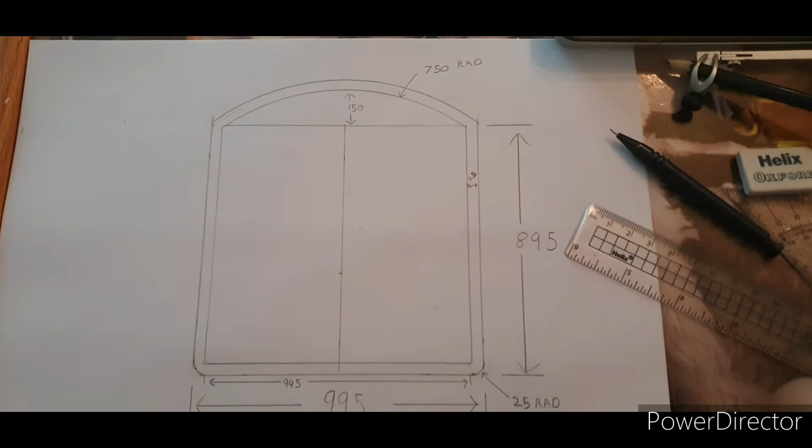Right, so pretty much that is the main frame. It's all going to be made out of 25mm angle iron. I'm going to try and make all this frame out of one piece, you'll see how I plan on doing that. There will be a lot of welding because I haven't got a bender, a roller to be able to do that, so I'm going to have to do loads of little cuts to hopefully bend it and get that bit of a curve in it there.

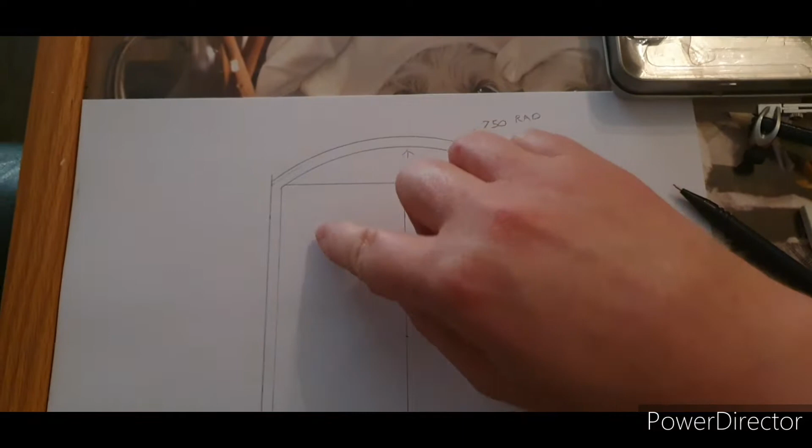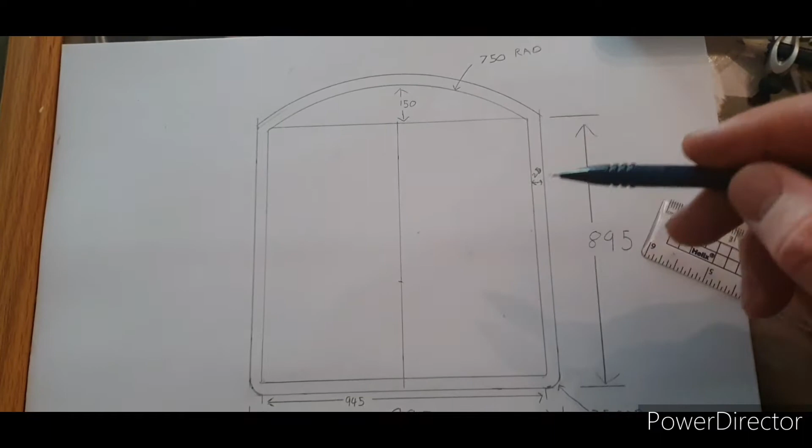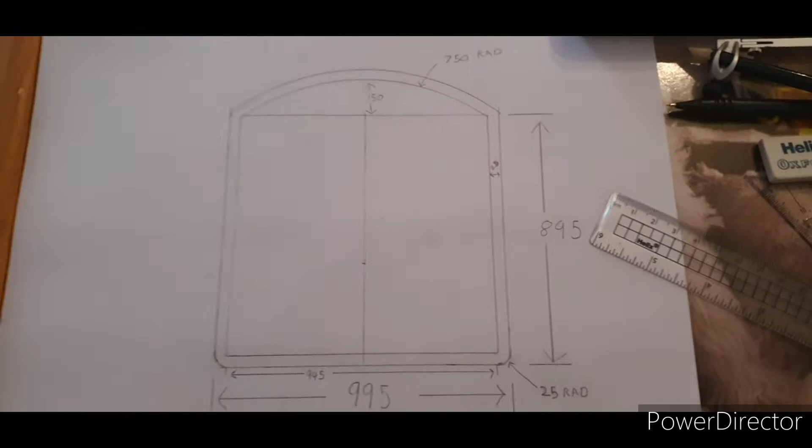And then my plan is, I've not sourced any wood yet, I'm wanting to put some wooden slats in it, so I haven't got a clue what size wood I'm going to be able to use yet. For each gap on each bit of wood, I'm going to put another 25mm piece of flat bar covering each gap. I might even make some little rivets to go all the way around to hold the wood in, as well as on the down pieces I'm going to put in. You don't need it, but I think it'll make it look really nice, some handmade rivets to go all the way around it.

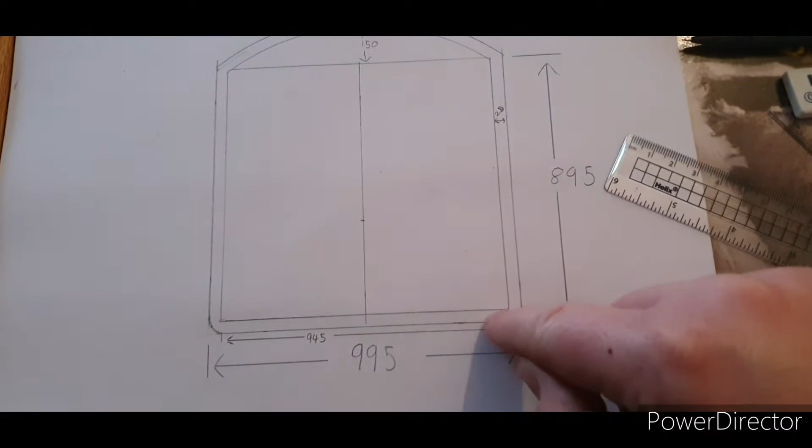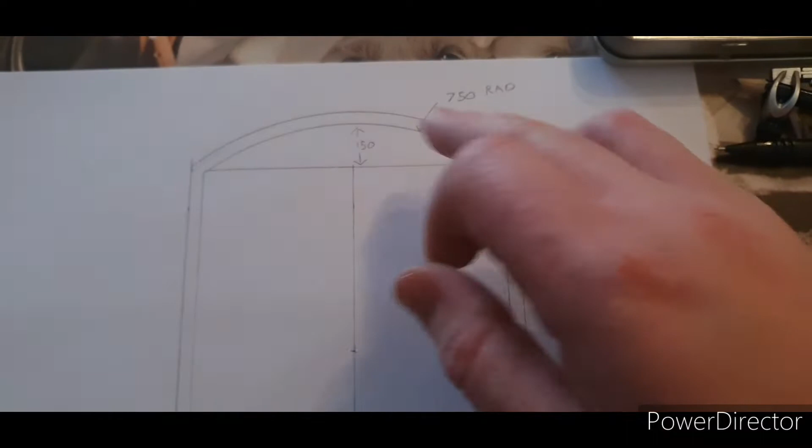So yeah, what I'm going to do now is work out a quick template on how I'm going to cut the angle iron so I can bend it to get a nice square corner on the inside and a 25mm rad on the outside corners. I'll also need to do the same with this one - it's not as critical because it's going to be a bit of a guess when I come to do it. I've got it as like a 750 rad, but we'll just see how it turns out. I'm not overly bothered about that one.

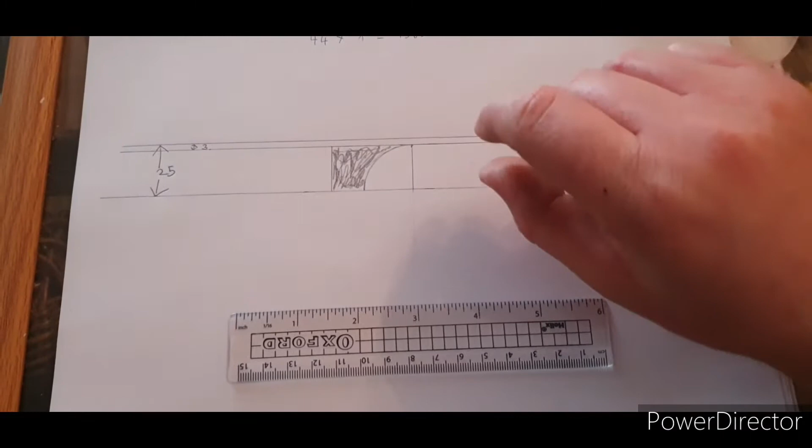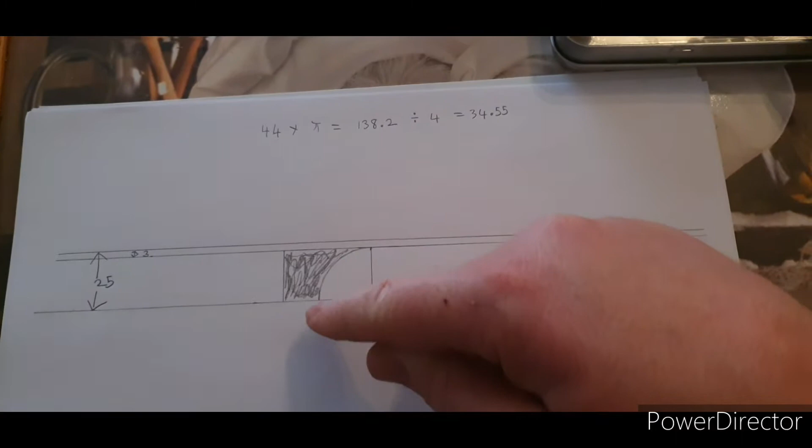So what I've got here is, imagine this is your angle iron. This is one flat surface, the other is facing downwards. It's 25mm angle iron by 3mm thickness. So what I've done here is, this is the 3mm, so from here to here would be 22mm. So what you do is figure out the rad - so it's a 22mm rad.

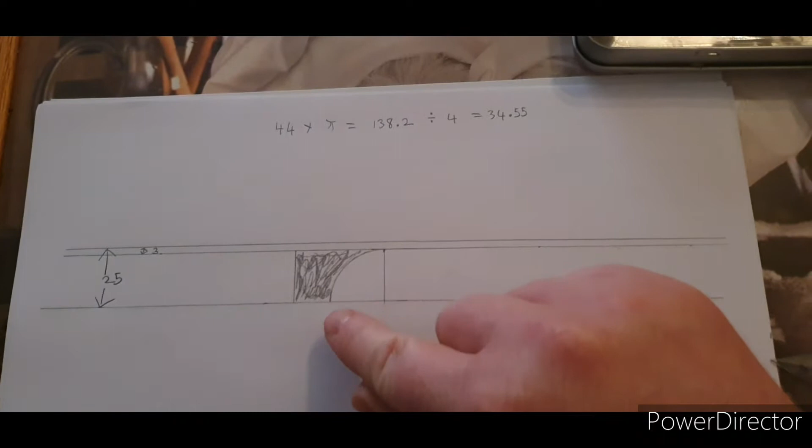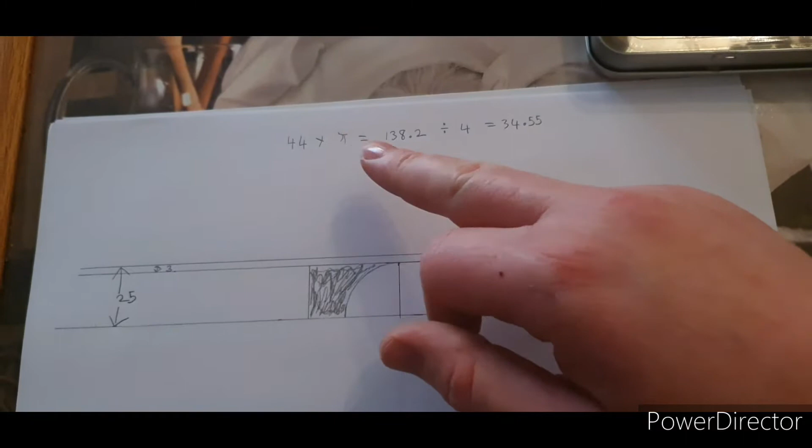Now if I wanted, I could get a piece of 44mm round - that's from here, so if you do a full circle it would be 44mm diameter. So I've done 44mm times pi, which gives you 138.2. Divide that by 4, because I only want a quarter of it, which gives me nearly 35.

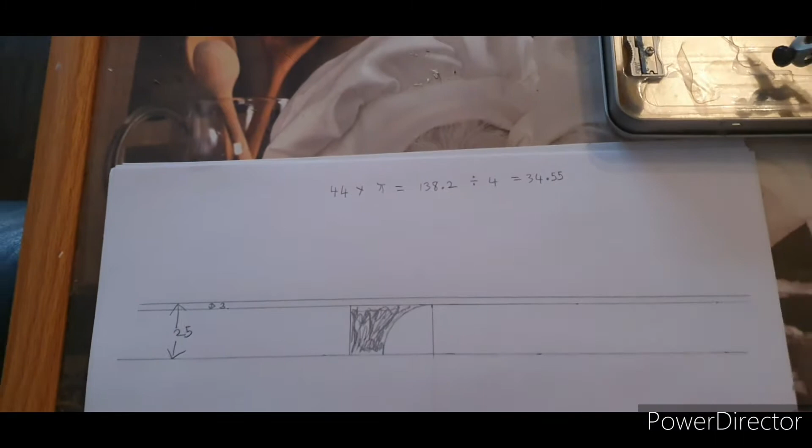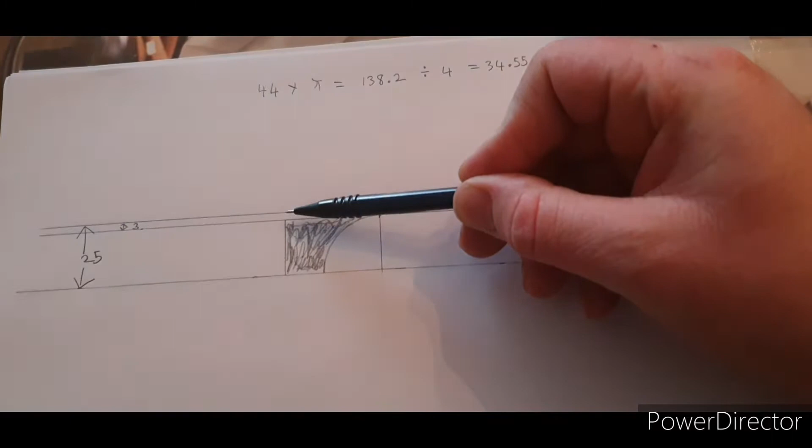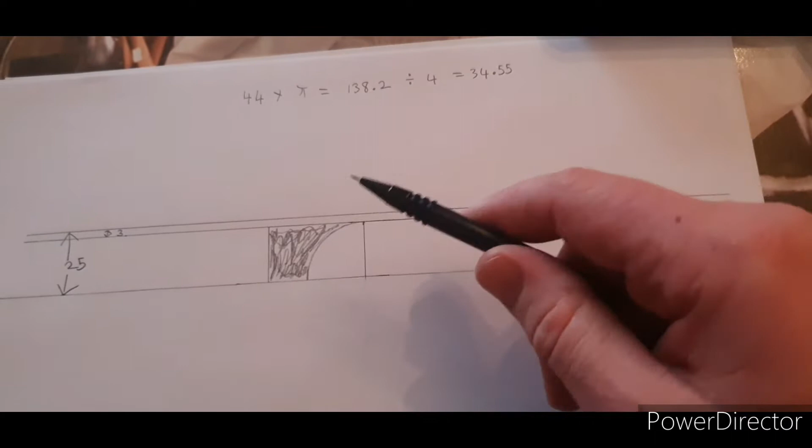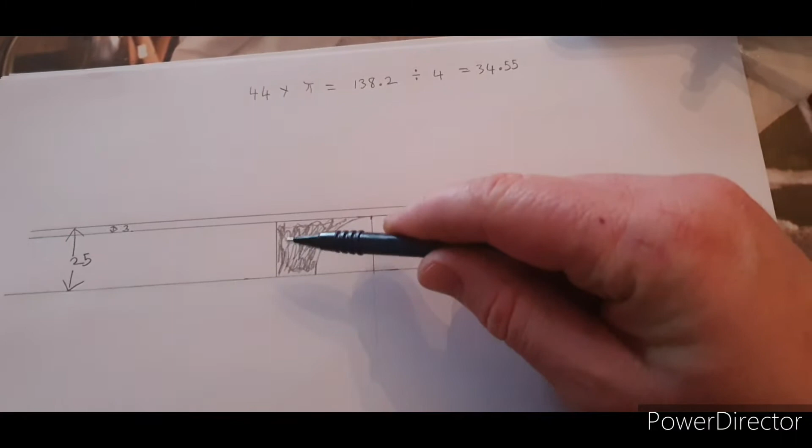So what I've done is, imagine I'm cutting straight in at 90 degrees - that'll be my first cut, all the way up to this 3mm section that's going down. Then I've measured from there to here - I've marked it at 36mm to give me a bit of clearance. From here I've set my thing at 22mm and done that. So this section here that I've coloured in needs to be cut out.

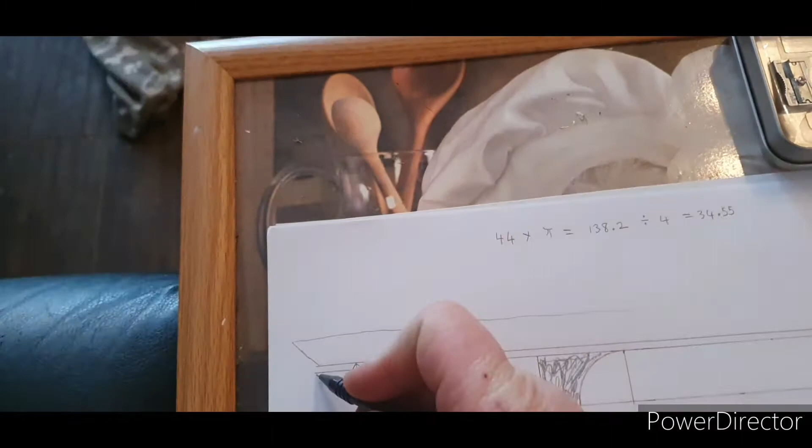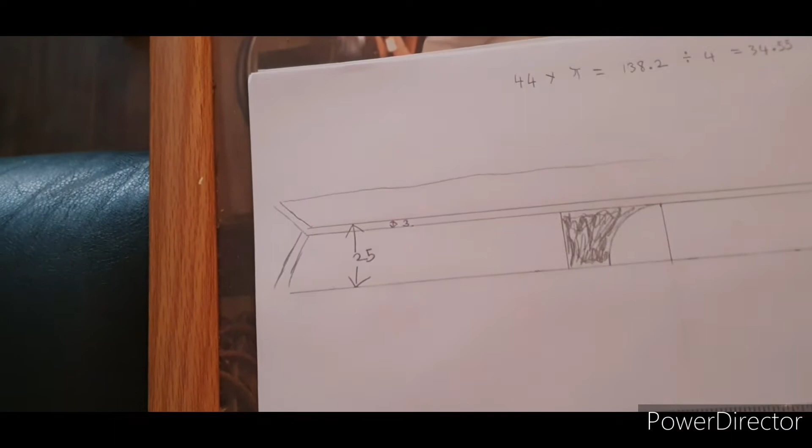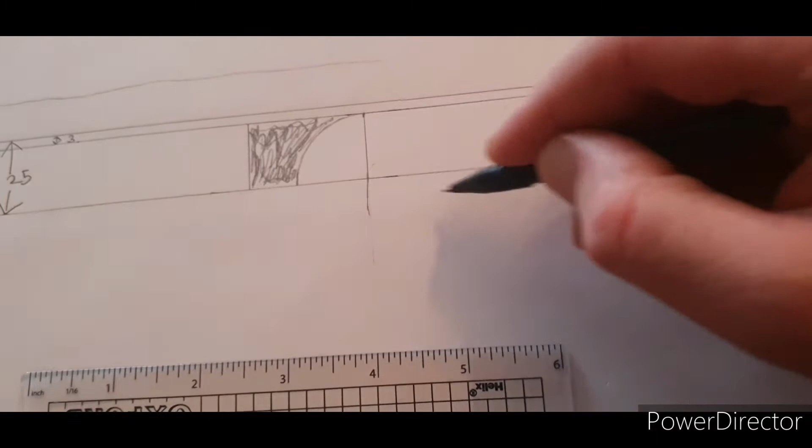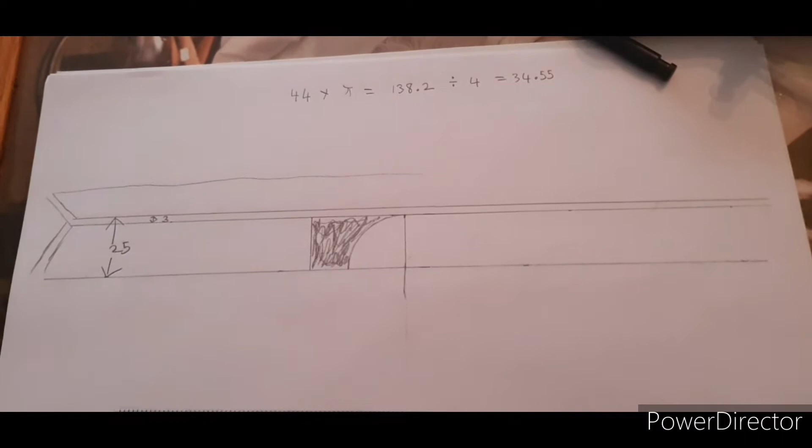Now imagine this is the section, the other side of the angle iron - that's sort of what that side looks like. So once I've cut this section out, I should be able to bend it round here, which will give me my 90-degree bend and leave a nice radius on this corner, but also get a square corner on the inside. I'll probably end up cutting this out and drawing it on, to save me having to draw it on each time on the actual metal bar itself - if I just cut this template out, it'll make it easier when I come to actually making it.

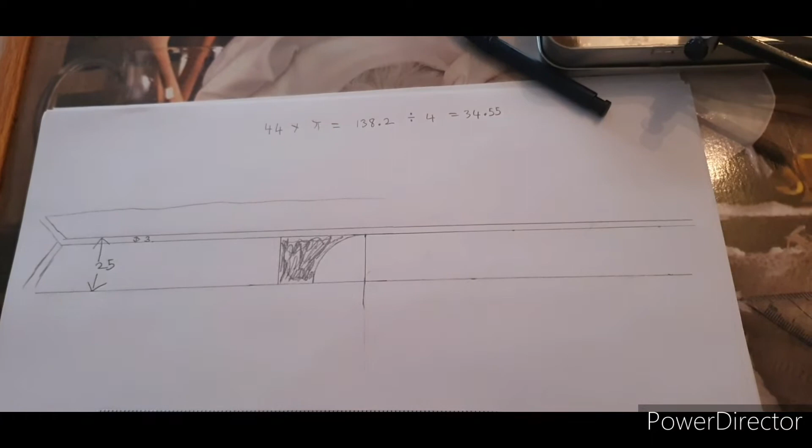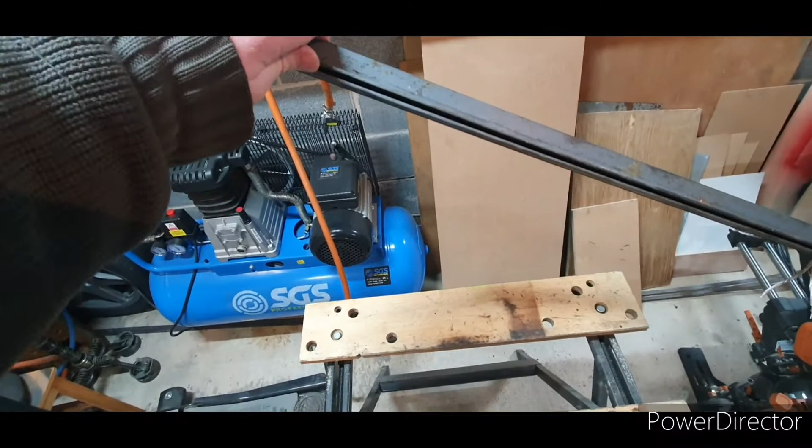Right, so these are my drawings that you've just seen me do. Now I was planning, this is the angle iron I've got - what we're planning on doing is trying to do this entire frame out of one piece, and maybe have it join in the middle at the bottom there. I'm not going to do that now, I think it would just be too much of a pain in the ass trying to do it that way.

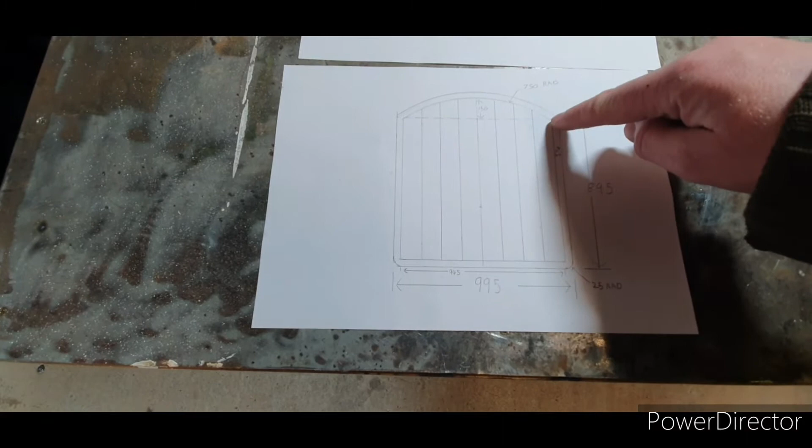So what I'm going to do is cut roughly - well, I'm just going to cut 3 meters off. I'm going to do this bottom and sides, and then do this one separate, and weld it on at the top there.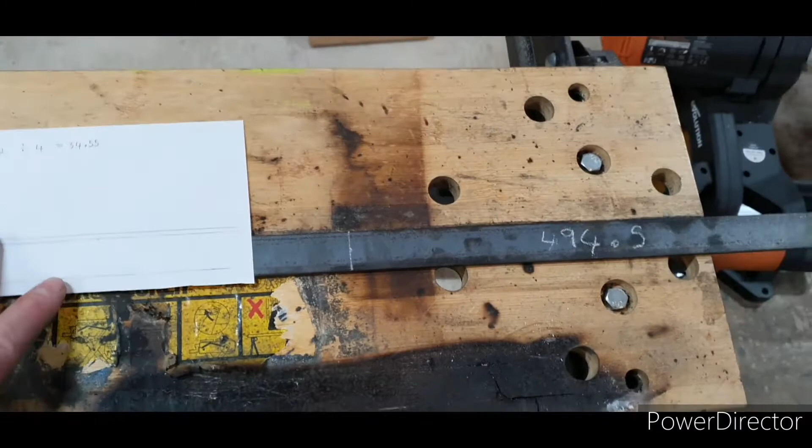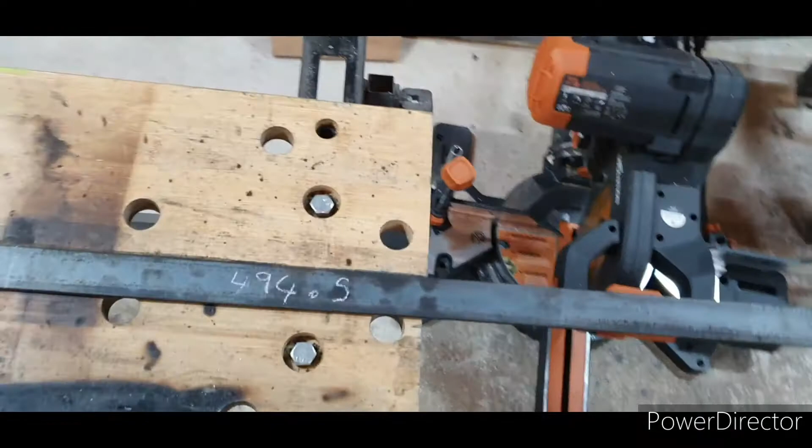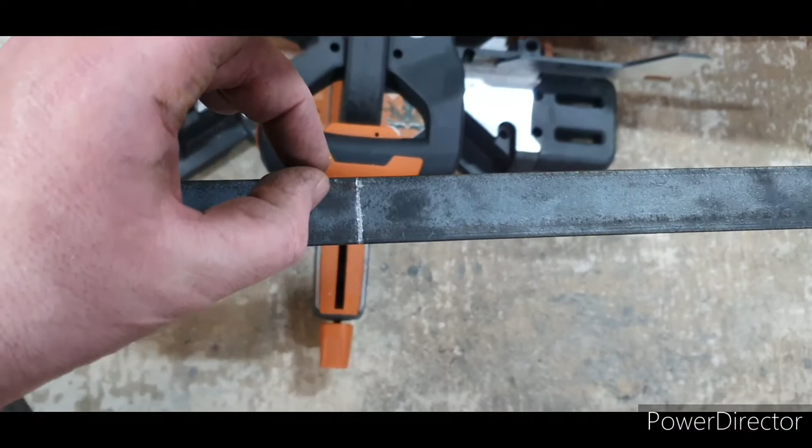Right, so what I've done, I've cut one off at 3 meters, I've got it in here. I've marked the centre, and then we've marked the length of the bottom minus the 3mm per side. So what I need to do now is - because if you look, that's the other side that goes down, so this is 3mm thick here - I mark that on the template.

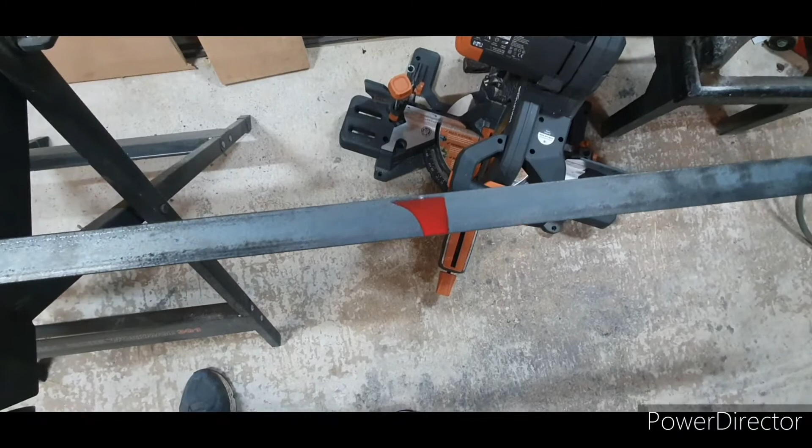If I put that on there like that, that section of steel is what I need to cut out. Right, so I've got that marked off now. Basically what I need to do is cut that red section out.

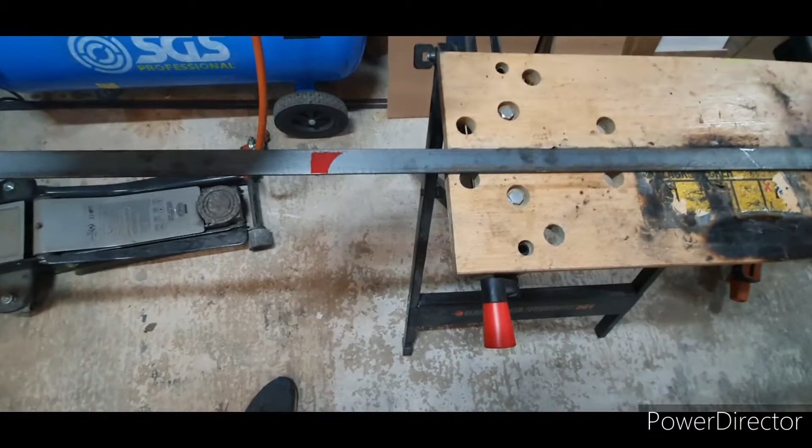Now from that point to this point should measure 989mm. I almost got it wrong as well. I put my template on that way to start with, but I had to rub it out because I realised I'd got it the wrong way, and it would have ended up being 50mm too long if I'd done it that way. So now when I cut this out, this 3mm section here will add onto there, which will bump that back up, that 6mm that I've done it short. I'll get them cut out now, see how well that goes. I'll stick it on a quick time lapse for that.

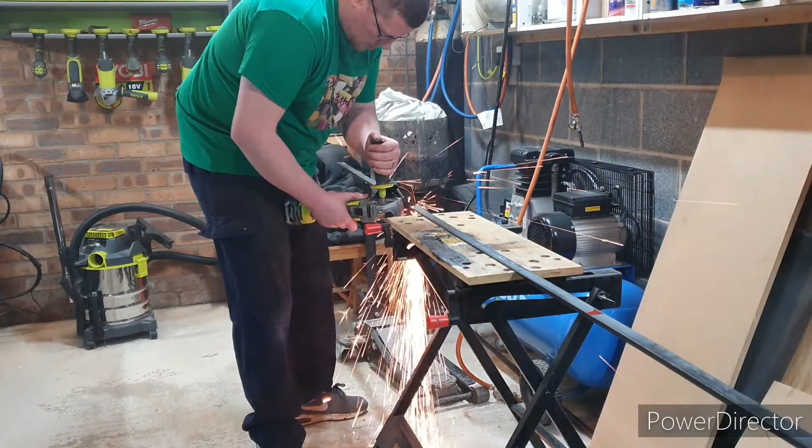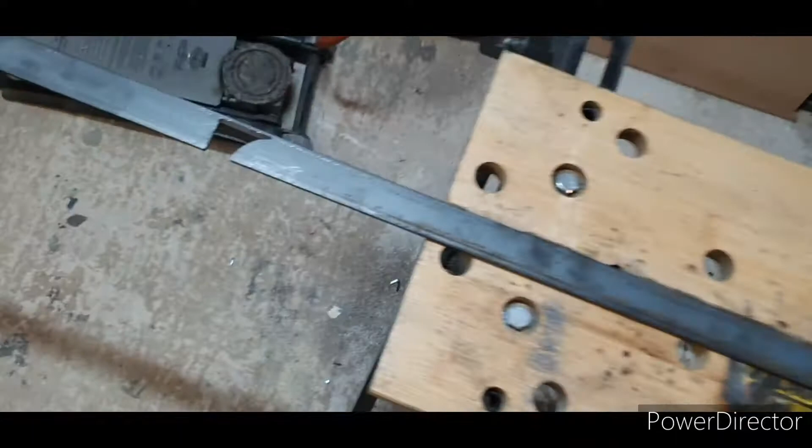Right, there we go. So hopefully these should just bend round nicely, and then just weld it up as I'm going. I might put a little bit of heat in it, it will make it easier, but I think I can probably get away with doing this cold, so I'm going to try that.

I'll just get a little bit of a grind on edges so I can get a bit better penetration with weld. So what I'm going to do is weld them all up, grind them flush, and then this is going to get painted. So we'll crack on with that next.

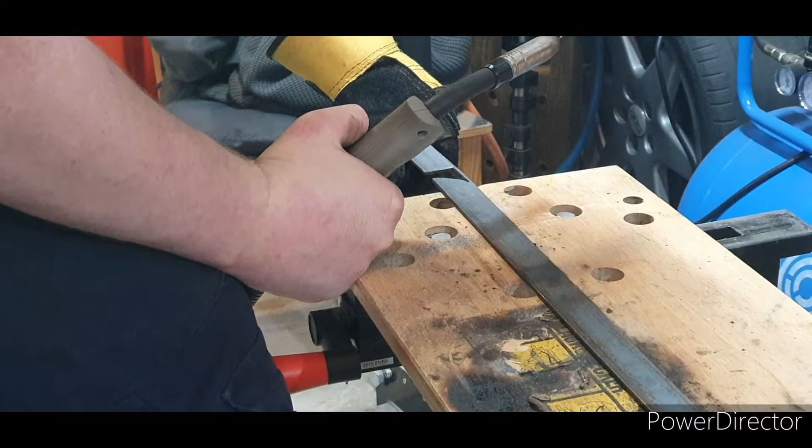Right, so I've got that clamped up in here, so I'm just going to try bending it. Hopefully it will work.

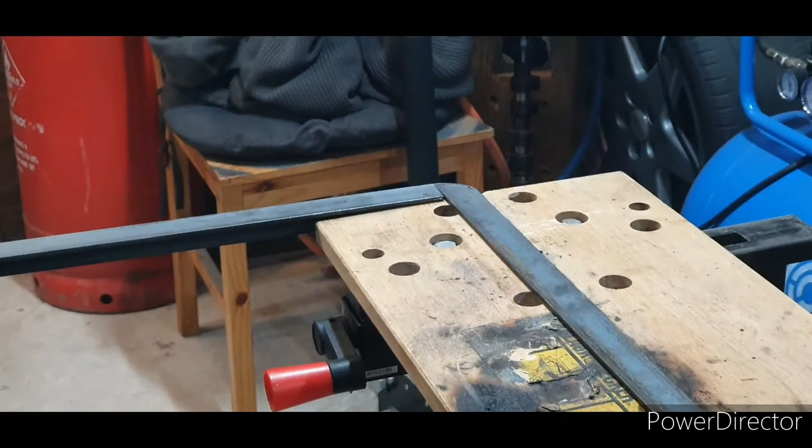Right, don't know if you can see that, we'll just bring you in. See how that works? Yep, that's absolutely perfect.

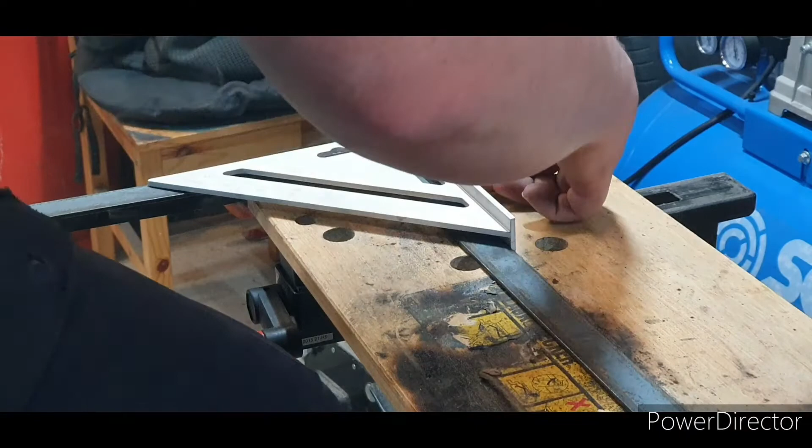Just bring you in and show you that. Zoom you out a little bit. As you can see, that's nice and square. Just need to get that welded up now and do the same on that side.

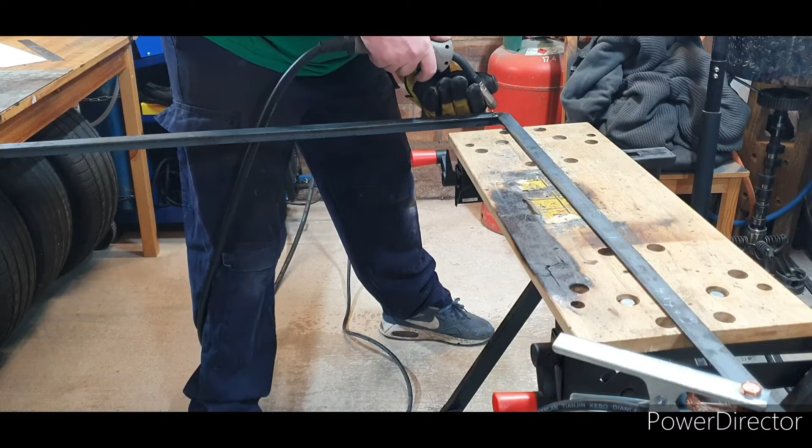There we go. Same on the other side. And I can weld the back side and grind this face off.

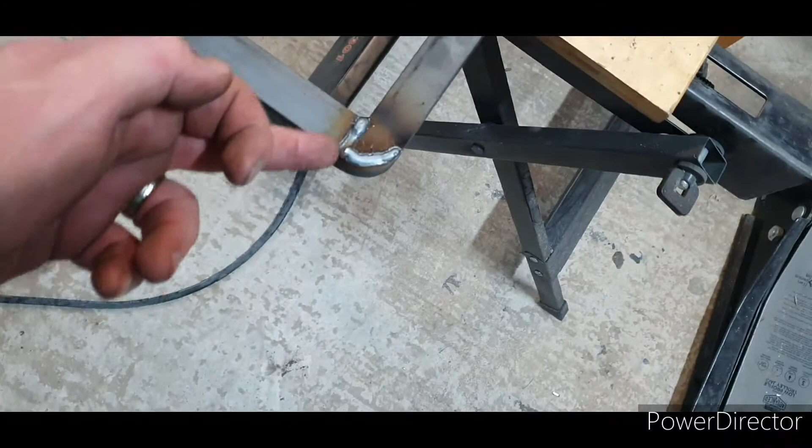Right, so both sides welded up. I've done a run on the inside on here as well. So what I'm going to do now is just put my grinding disc on that and give these a clean up. And then what we need to do is have a look at making the arch section of it. So I'll just whack you on time lapse while I grind this up.

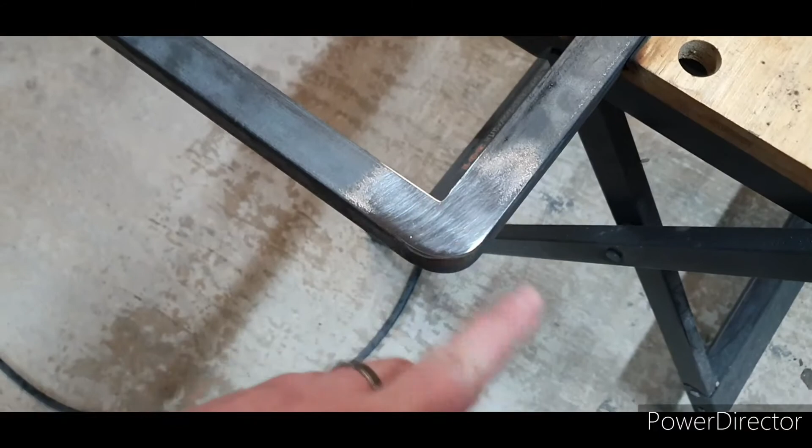Right, so they're ground up, finished, quite nice. I am obviously going to be painting this once it's done. So now that's that section finished, let's have a go at doing this bit of an arch on it.

Right, so I've cut this off at 1100mm. The overall gap on this thing from one side to the other, same on the drawing, is 995mm. So what I'm going to do is put a load of little slits every so often all the way along it to try and put that bit of a bend in. I'll just weld them back up and grind them off once I've got a decent bend, and I can cut it to length and just weld it all together then. So I'll stick you on time lapse while I do that.

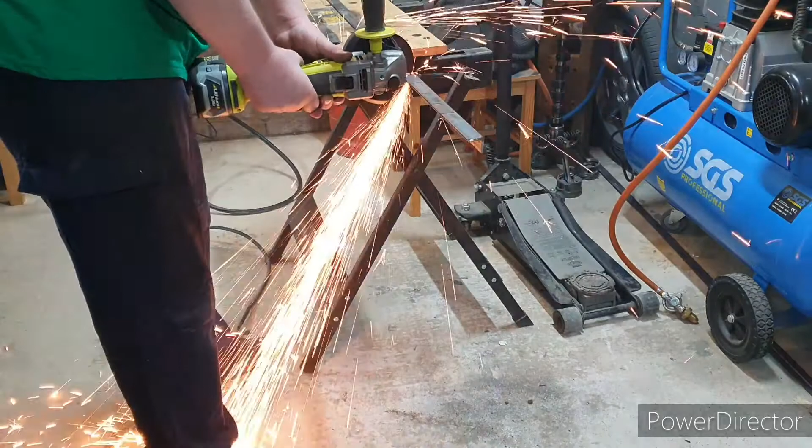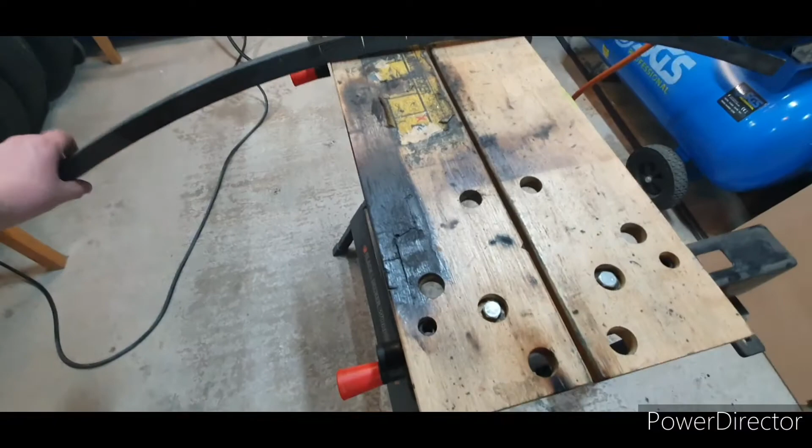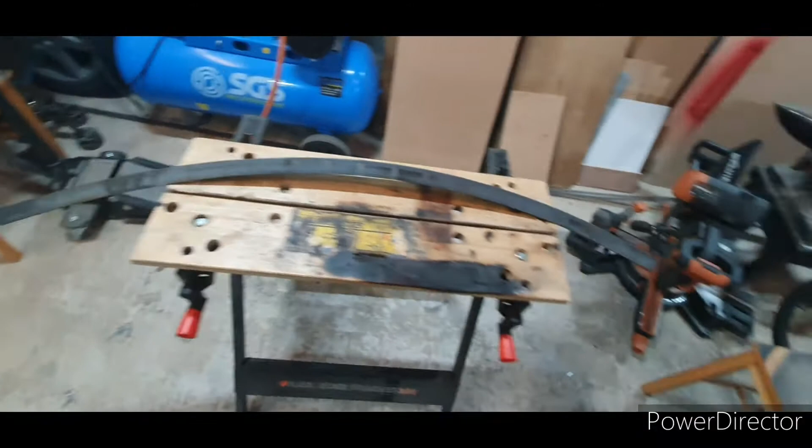So that's come out fairly well, it's not too bad. Don't think I'm going to go much more than that. Actually, I'm going to leave it at that. I think that will be spot on. So I just need to work out my length now, cut these off and weld them onto the other side.

I didn't want to do too many cuts because obviously I'm going to weld each one of them back up now. So I'm going to do that first and then get it all put together properly, and then we can start putting some wood in it then.

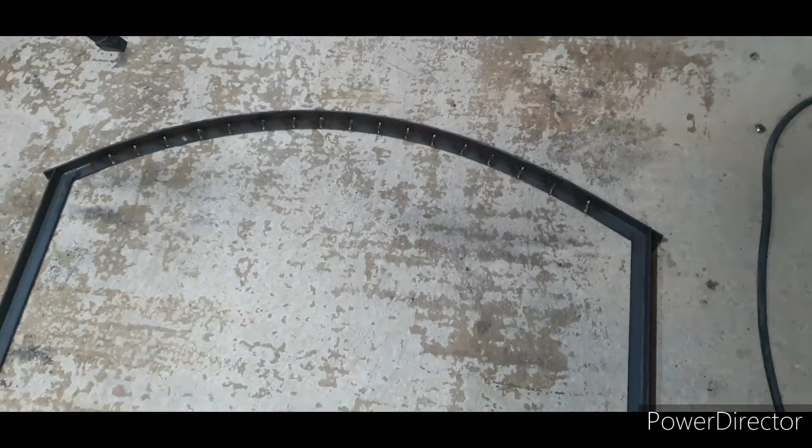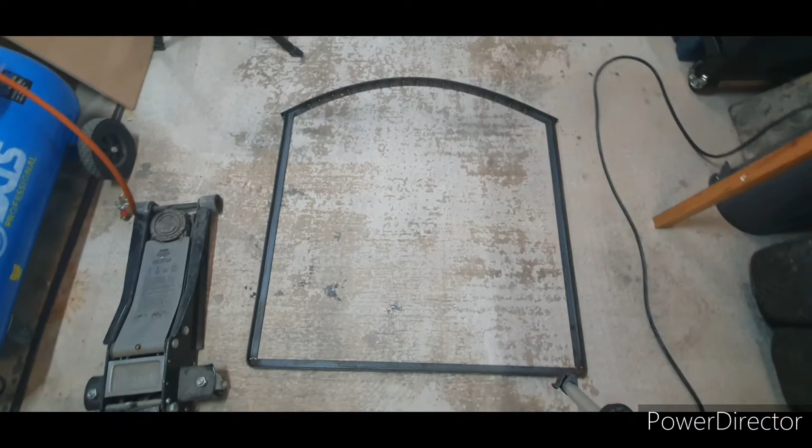Right, what I've done, I've cut the legs to length. I'll just chop this little piece off of there, and that's the size it's going to be. I forgot to show you me cutting them off, but basically I just marked them off, cut them, and now it's time to weld it all together.

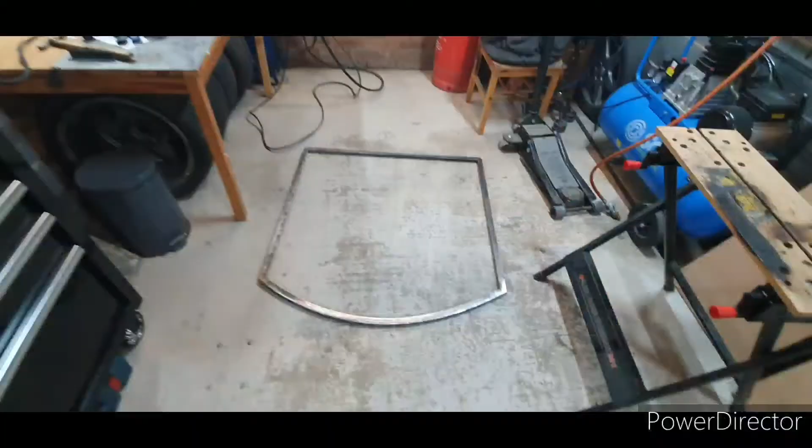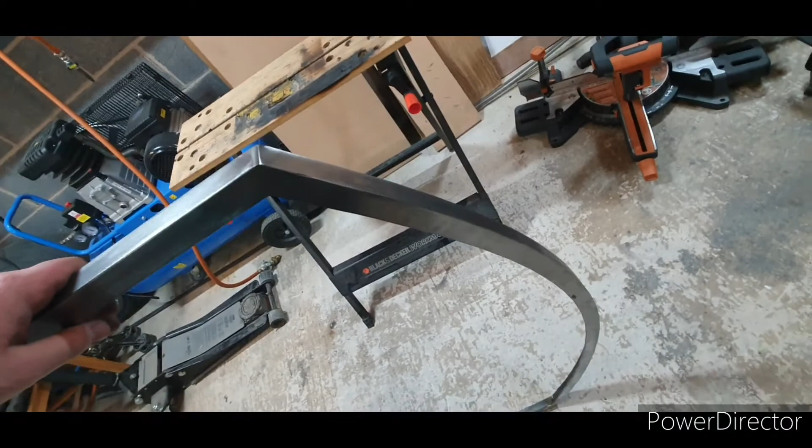Right, so that is the frame pretty much done now. That's the bottom corners, came out quite nice. Fairly pleased with how that's come out so far.

So what I need to do now is work out this wood. I'm going to put this wood in, and what I'm thinking is, if you look down there, I've got some more flat bar, and I've also got some up there. I'll probably go with something like this and do a couple of runs of flat bar just down that face, just to break it up a bit for the wood, plus it'll hold the wood in a bit better as well.

Right, so this video is getting fairly long now, with me showing you how the workings are and everything. It's adding up quite a bit. So what I'm going to do is split this into two parts. You've seen me make the frame. In the next part I'll be fitting all the wood and figuring out where I'm going to put the down sections, and depending on how long that takes, I'll probably make all the brackets and everything to make it work in the next video.